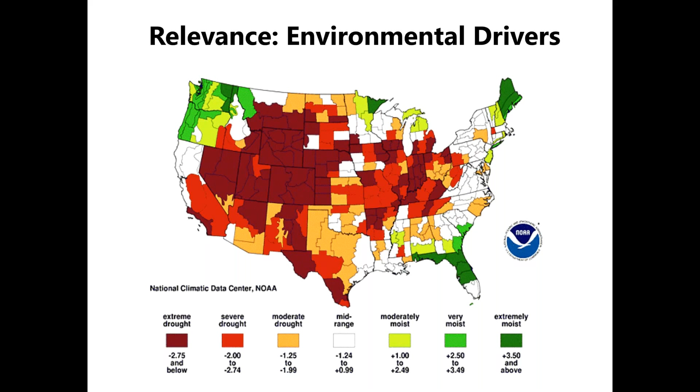Really talking through the drivers of why is this really taking hold across the nation. Obviously, there are environmental drivers of drought that actually are critical of really putting this in the forefront and attention of real scarcity of supply that's out there. We have in some states, I just pulled this one, I was just in Utah at the Intermountain section there, and the driest year on record, and I know some of you on our call are from the Southwest today, so you certainly have experienced this. It's a challenge, it's a driver of why utilities are really getting their hands around the source.

There's obviously a public relations side. This has an extra special twist as it relates to investor-owned utilities, and that is that in rate cases and how you're looked at in terms of the public, many times public staff is looking at the way your operations are being managed, efficiencies, and I'm going to kind of hit around all of that today of some of the current guidelines that are out there that are really, quite honestly, not that helpful. But the public is very interested in how we are managing non-revenue water.

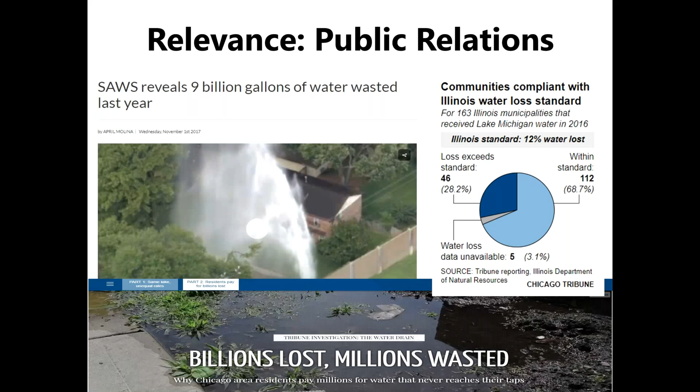Another slide there of this, the words that really catch the attention, billions lost, number of swimming pools that are leaking. Why can't you just go fix the leaks? A lot of these things that are sort of the emotional drivers out there on the public side.

One of the newest developments, I would say, that's really driving this issue of paying attention to non-revenue water and really reducing those losses to economic levels is the bond rating agencies, now to include Fitch as well, but Moody's, Standard & Poor's, actually looking at how a utility is managing their non-revenue water, from a general report still based on a percent of unaccounted-for water or percent of system input volume in the vulnerable category, up to a strong, which has been doing water auditing on an ongoing basis and letting that really drive their behaviors for reduction of losses in the system.

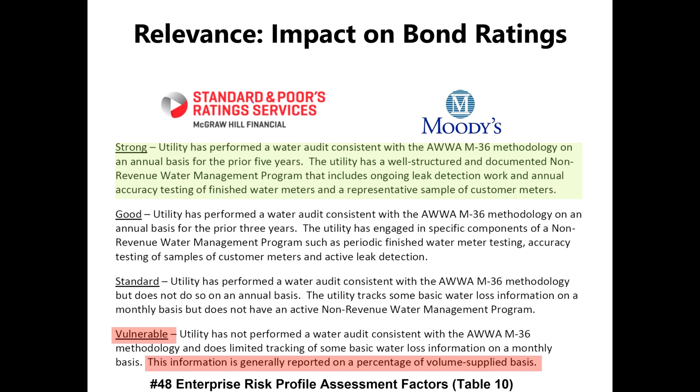And actually, we have some pretty powerful success stories in the past month where bond ratings have been increased. That has been a substantial reduction in debt service on new issuance. There's some interesting developments there that are happening. We have a very real supply issue, and this one is a public utility, but there are a number of case studies out there in the private investor-owned as well.

This is the city of Asheville, North Carolina, the self-proclaimed beer capital of the world, where they've actually, over the past 10 years, it's hard to read the bottom of that slide, from January of 2007 to September of '17, maintained the actual supply volume while increasing authorized consumption. That's been handled through a direct reduction in water loss. So that's pretty powerful, and that is indeed the one that had the bond rating increased as well.

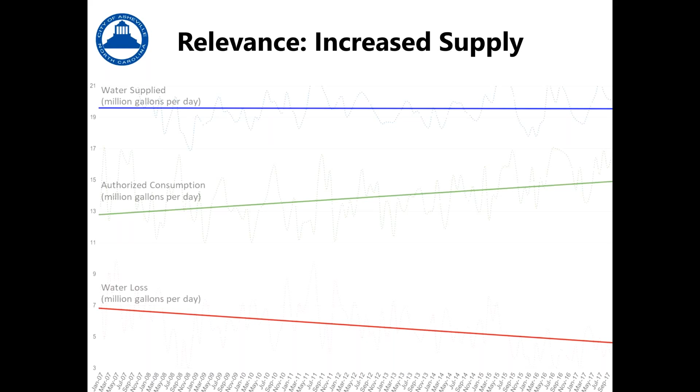That has meant increase in revenues, both in the dollars that are being recovered, total avoided cost, about $3 million for this particular utility, and then also in terms of the actual reduction of leakage in the system from about 7 million gallons down to 4 million gallons a day. So some pretty substantial reductions there.

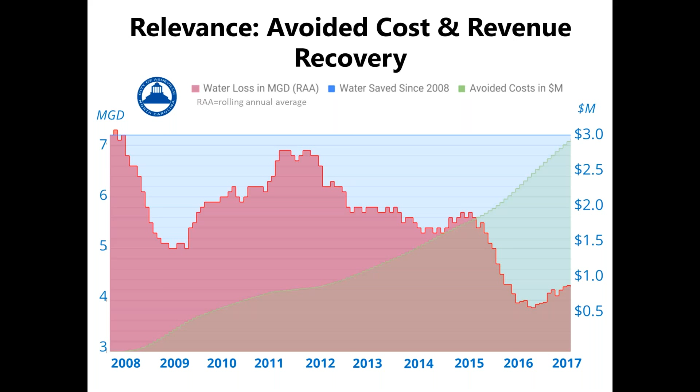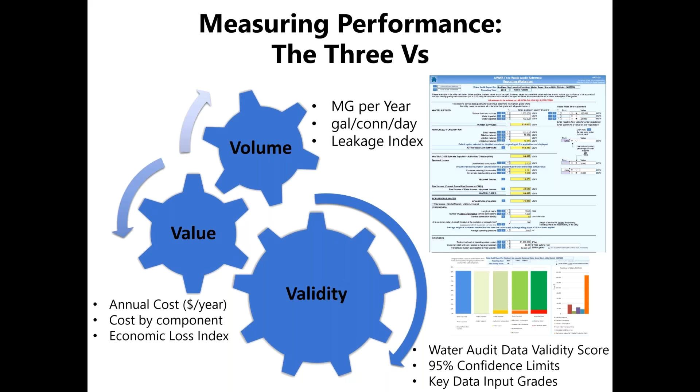And from a business case, and this is what we really are talking about, and weaving into your rate cases, where you've got a rock solid plan of action of how you're managing your utility, defining this economic optimum and the resources you're putting forward. That's what we need to be looking for. And of course, that's new revenue, and it's also new supply that's out there.

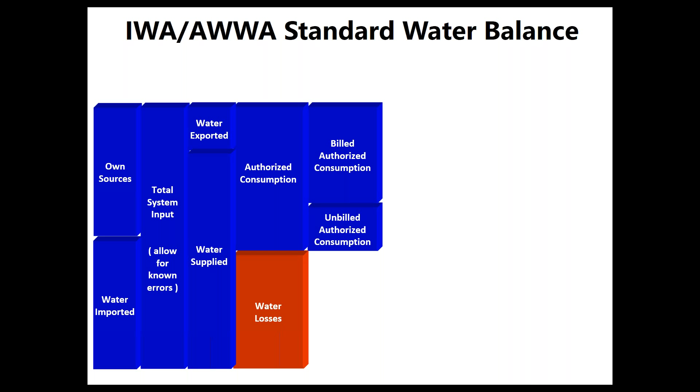Our authorized consumption can further be broken down into subcategories. It can be either billed or not billed, and metered or not metered.

In the billed consumption, typically the largest volume in our water balance is the billed metered consumption. This is your customer base generating revenue, such as domestic, commercial, industrial, and institutional classes.

The billed unmetered consumption is the part of the billed authorized consumption volumes calculated based on estimates or norms from water usage sites that have been determined by utility policy to be left unmetered. So any flat rate customers you may have would fall under this bucket.

The unbilled authorized consumption is unbilled but still authorized by the water utility, and this includes unbilled metered consumption and unbilled unmetered consumption.

The unbilled metered consumption is authorized by the water utility, but for any reason is deemed by utility policy to be unbilled. Examples might include metered water consumed by the utility itself in treatment or distribution operations, or metered water provided for municipal purposes and civic institutions.

The unbilled unmetered consumption is still authorized consumption, but it's not billed or metered. This component typically includes uses such as firefighting, flushing, street sweeping, fire flow tests conducted by the water utility, etc.

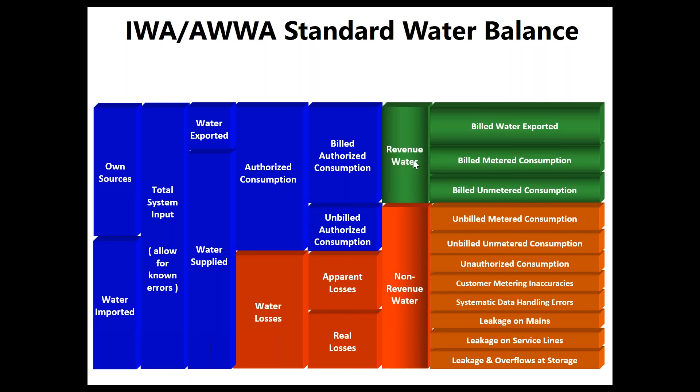Our water losses, quite simply, are the difference between the water supplied volume and authorized consumption. But we can't stop there. Our water losses are further divided into apparent losses and real losses. This is the fundamental difference from the term unaccounted for water that was abandoned by AWWA.

So we are quantifying our water losses by taking the difference of our water supplied and authorized consumption, and then further disaggregating our water losses into these two different types of losses.

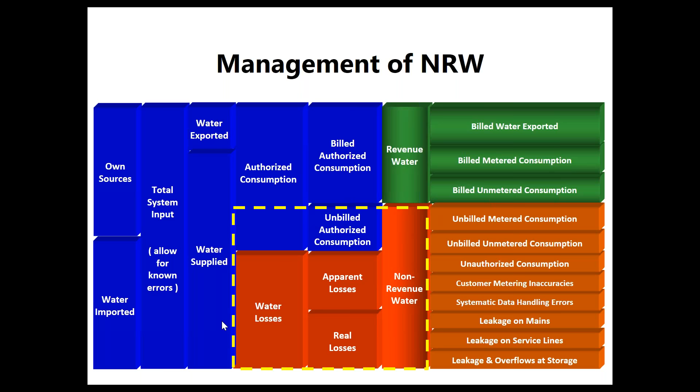Our non-revenue water is made up of those components of the system input volume that are not billed and produce no revenue. So non-revenue water equals our unbilled authorized consumption, apparent losses, and real losses. The sum of these three is what we are calling our non-revenue water.

We can dissect that a little bit further. We've already discussed some examples of our unbilled authorized consumption, and it's important to note that even though policy may permit these types of usage, there's still a value associated with these volumes. One of the tools for controlling unbilled authorized consumption may be efficient flushing practices and awareness campaigns, but also tracking these through estimation methods.

Our apparent losses are losses in customer consumption attributed to inaccuracies associated with customer metering, systematic data handling errors, and unauthorized consumption or theft. Our apparent losses represent those non-physical, sometimes referred to as paper losses, that result in uncaptured revenue for the water utility and distortion of customer consumption data. Some of those tools for control include data management, quality control practices, and meter testing and repair practices.

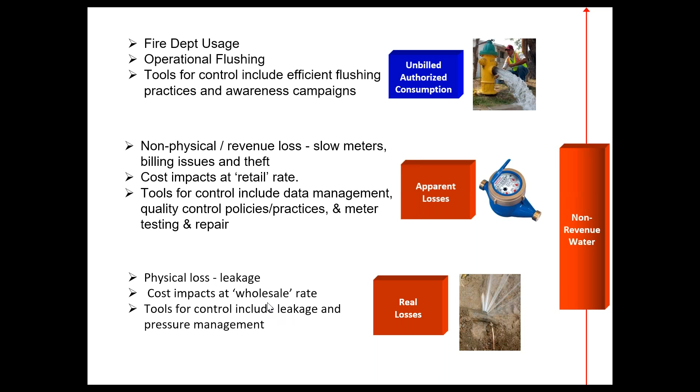Now, the tool used to create the water balance is the AWWA Free Water Audit Software. This software, as the name suggests, is freely available. It is the industry standard for water auditing, and it's also in an Excel format. So although it's called a water audit software, it's indeed an Excel spreadsheet with a lot of good tools under the hood, so it's a familiar tool that we're all used to using.

What you see here in front of you is the reporting worksheet of the software. The water audit is conducted for an annual time frame, either calendar or fiscal year. As far as the inputs into the tool, there's not that many—only about 10 to 13 volumetric inputs are typically used by utilities, and there's a handful of system and cost inputs as well. So not too many inputs to complete on this reporting worksheet.

There are also some default values provided here for some of those volumes that are difficult to quantify. Those might be unbilled, unmetered usage if we're not tracking it through some type of estimation—there's a default option for that. Another example would be theft, which can often be difficult to quantify, so there are some default options to help us estimate what that volume may be in our system.

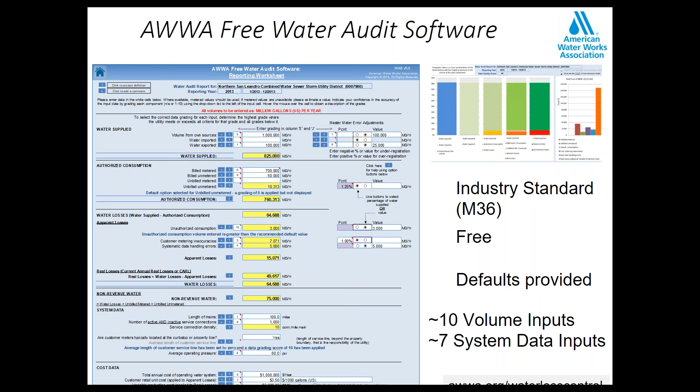These are just some snapshots of some of the performance indicators within the software. This is the output data. So think back to those 3 V's that Steve mentioned earlier: volume, value, and validity. That's the lens we want to look at our performance indicators through.

Some of the information we see here would be the overall data validity score. We see that up in the top of the screen here in red. In other words, how reliable is my data? This data validity score is based on practices and policies that are unique to each of those input values in the water audit software, and it gives us some direction as to what types of next steps we might want to consider.

We can see the volume of our losses annually, both apparent and real losses, and we can also start to see how much those are costing us. We can also see our non-revenue water as a percent of cost of operating our water system, and additional performance indicators in terms of per service connection per day, and we can also start to gauge the leakage in our system.

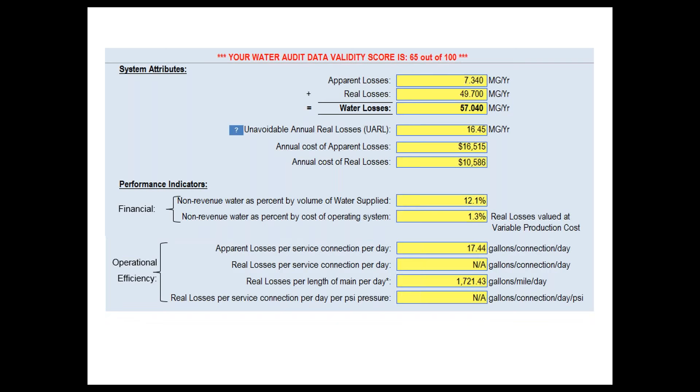So performing the water audit annually is really the only way to truly track our water losses and non-revenue water, and compare our progress year over year in order to make those informed, cost-effective decisions. This is a top-down approach. I'm now going to pass the controls back to Steve. He's going to talk a little bit about the bottom-up approach and some advanced validation techniques that can be considered.

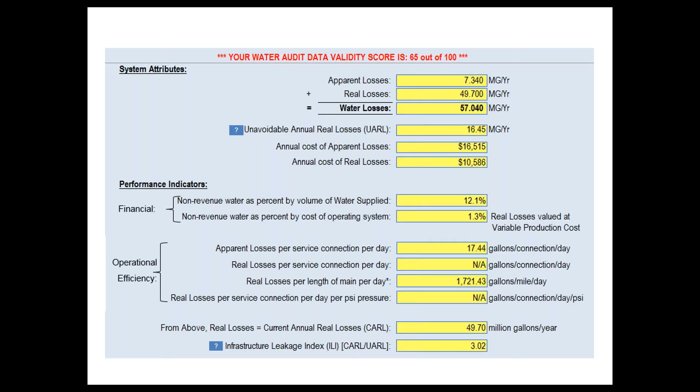Thank you, Drew. Let me grab the screen back and get us going here. All right, quick check, Drew—everything looked good on your end on the pass? Looks great, Steve. Great, thank you.

Good overview, and that's one of the key pieces. I appreciate you spending the time to define each of those categories. We like to say that there's just a few of the inputs—it's simpler than your taxes that you fill out each year. The challenge, of course, is really digging into that data, the sources of that data.

The one thing I'd really like to do is drive home one key point, and that is that the top-down water balance gives you a single number for real loss or leakage as a resultant piece. What we really need to do is recognize that all leakage is not the same. I mentioned this briefly before, but I'll hit it now with a graphic to really drive that point home.

There is a companion tool, leakage component analysis, another free tool that allows you to take information you're gathering in the utility on the types of leaks in your system, an estimate of the volume of leakage when you make that repair. Is it a main break or service break? What's your response time? How long was it open? Some of that information can help you understand your practices on an annual basis to really start to identify how much of that is reported leakage.

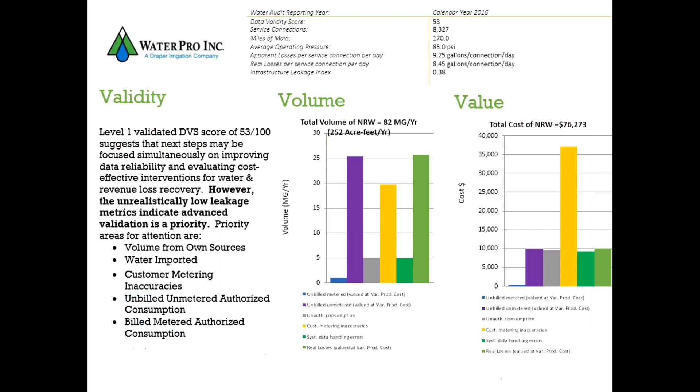So you really only have an economic bogey to go after of that 30 million that's remaining for unreported leakage in the middle. That's where you're basing your economics. So in this case, it may have been $25,000 of value of that unreported leakage. If you were able to recapture that, it has a value to you of 25, but to get it, maybe $150,000 annually.

So hopefully that answers it. And you may be able to put a finer point based on specific numbers there.

Yeah, Matt, this is making me think about some of the conversations we've had with BC, and on one hand, it's very easy to say we should not be using percent as any kind of a metric, but the reality is that it is used by lots of people. It's the question about what you're benchmarking that to that's got to change the conversation. And so I'm just thinking about

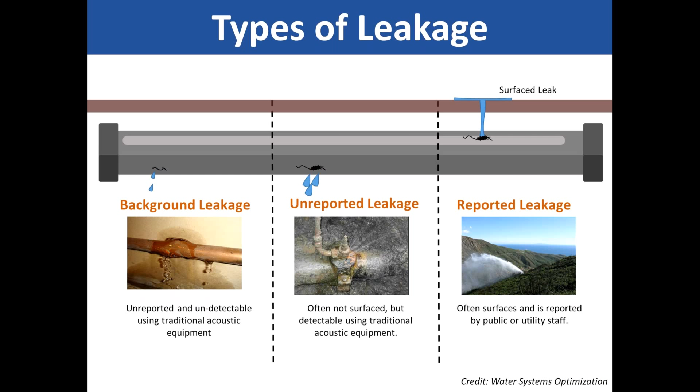Right, but I would offer that you really are doing a program. If you're monitoring, and at this level you're doing this rinse and repeat approach back here, where we're constantly looking at it. Are we operating at an economic target? And that's exactly what the methodology is saying. I tend to think of my programs as a little bit more active, but yeah, I agree.

Sure. Hey, Lisa, Steve, I joined really late to the call. And yeah, we do have a little bit of a program out there in Galena where we're constantly finding. We actually just found one this week that was a massive leak, but you're right, it's all rock and it's hard to find. And my question, though, is when we talk about economic level of intervention, and I missed it, so I apologize if you already talked about it, but how does that come into play when a regulator says,

for the system that Lisa was talking about, they allow us, I think it's a 20 or 25% level of unaccounted for water, and all the expenses related to that are allowed to be recovered in rates. And I think it used to be 50, and in the current rate case, the commission brought it down a little bit. How does that then play into the economic level of intervention if you're recovering it through customers' rates?

Yep, it's a great question, and again, it is the conversation we're having at the utilities commissions every day. Tennessee PUC, we're having this right now. And the fact is, they realize how flawed this is. They realize that that's a challenge. The answer is, like in Wisconsin as an example, they still calculate both. So they're doing the program, and the utilities are really starting to lean into this.

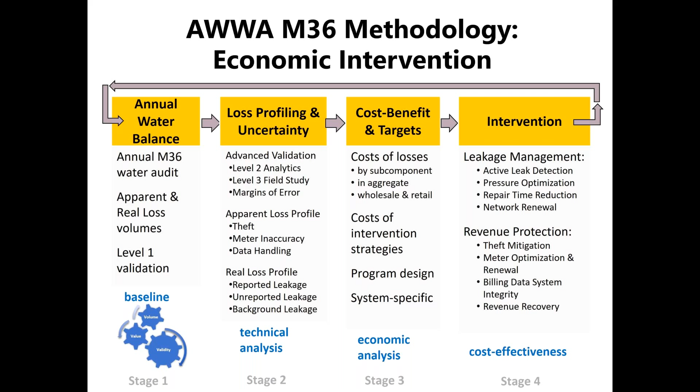So, Steve, I would say it only slightly differently, which is I don't think that what we take in from customers can ultimately sway that economic level of intervention very much, because that's the economic level of intervention for us, in that that's what customers are paying us. But at the same time, we have to look at it from the standpoint of on behalf of the customers, which would then be an eliminating entry in that, it's still a cost even though they're paying it.

The point that you don't care, you're going to sit home and drink, I think you said we were drinking Miller Lite. I think that's exactly right? Yeah. And no, I get the point.

That's kind of what I was asking, because Apple Canyon and Galena, two systems in Illinois, the unaccounted for water at Apple Canyon was averaging about 60%. It's pretty high. And Galena was like 45%. So those are pretty high numbers. And the expense we don't recover is pretty immaterial to that.

But I agree with you, Lisa, right? These customers are then paying an excessive amount of cost that's just being lost at the end of the day. So you have to do some math and say, we got $100,000 of expense total. What can we get that down to versus the capital to replace all the mains or stop all the leaks, right? Yeah, what they pay us is irrelevant. That's what I was curious about. I don't know if I missed it or not.

Steve, I don't know if you saw this slide earlier. That's why I went back to it. But this gets to just that. You see on the right side kind of overspending because you're only fixing the leaks at surface, or on the opposite side, you're going too fast. You're out there replacing pipes and doing really excessive leak detection.

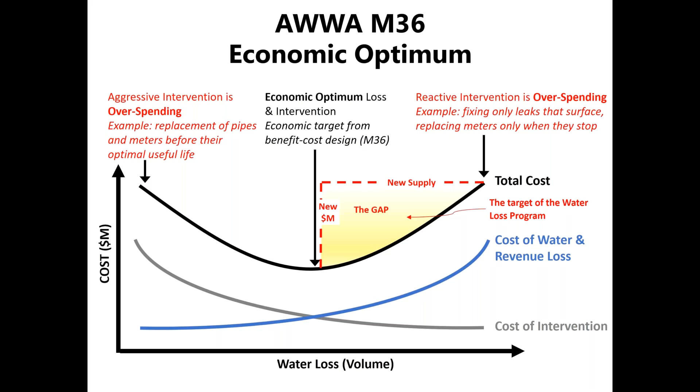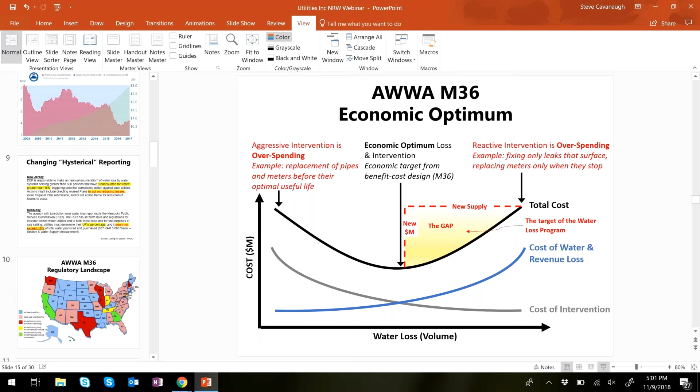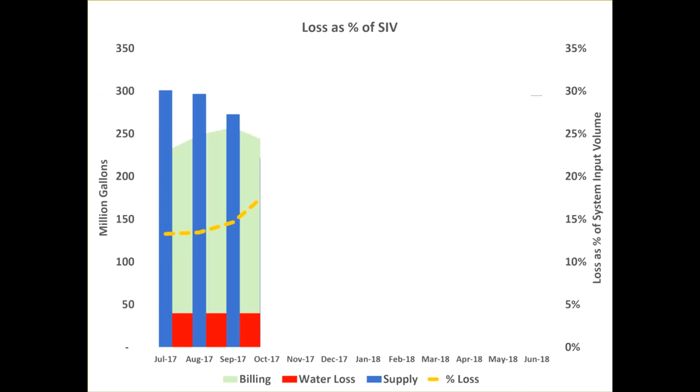Oh no, we get it. We all understand it means nothing. This is sheer curiosity territory now, we can basically say it's all over the board. It really is all over the board. Yeah. Right. That's why we're literally out every week, and like I said, some of you will see me next week down there at the NARUC conference. So yeah, we're out telling that story.

Yeah, no, it was pure curiosity, and we're all over the board ourselves, right? Even just within our states, we have some that are really tight, and we have pretty good data, right? We're tracking it on the same time period. Well, we think we have pretty good data. And we're as low as 5% at some of our systems, and some up at 60, almost 70. So yeah, all over the board.

Well, believe it or not, there is actually a value for us to having that number, and that value is that we have pretty risk-averse owners, and they believe things when they hear that it happens to somebody else. And so it is actually helpful to say that, yeah, it does seem like a whole lot, but here's all the reasons you just talked about. And there's people that have way more than this, and that's still okay. Or it could be okay. Yeah, that's a good point.

So this is John Hoy. I got a quick question. I know you guys are non-revenue water, but half of our business is wastewater. Do you know if there's a similar tool for inflow and infiltration, I&I, on the wastewater side? Right. There's not that we know of on the wastewater. I am very familiar with inflow and infiltration. Certainly metering by basin is a key element, and there's metrics of gallons per inch mile of system. But there's no tool that we're aware of on the sanitary side. Okay, thanks.

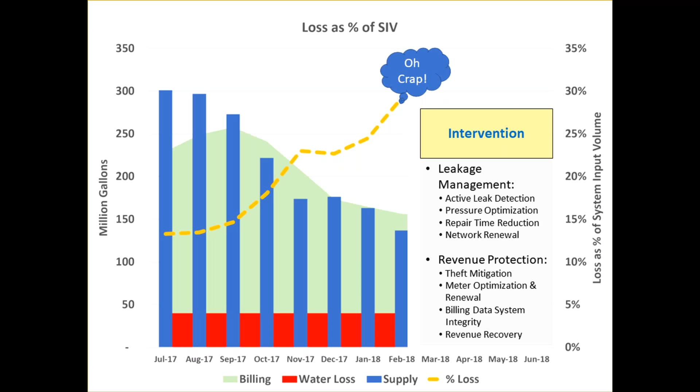One, I think through all of your managers is to continue to train, as I know you've done in your states, Matt, on these business practices. I think having a few of your systems go through the auditing process is important. I was asking Drew to maybe pull up the Catawba River Basin, which is a grouping of utilities that.

Drew, if you've got that, let me go ahead and have you take the screen. If you could take that real quick, I think that'd be helpful for the team to see. But basically group together your systems within a particular region and start to show some metrics up there relative to real loss per service connection per day, maybe looking at apparent loss, and where you've got some.

Because in many cases, like Golden State, when we did massive training in California, they basically had centralized billing, they had centralized service of meter testing and so forth, and a number of things that they were able to offer out. We're seeing wholesalers doing it now. We've got a grouping of utilities that you could start to have some data to feed back.